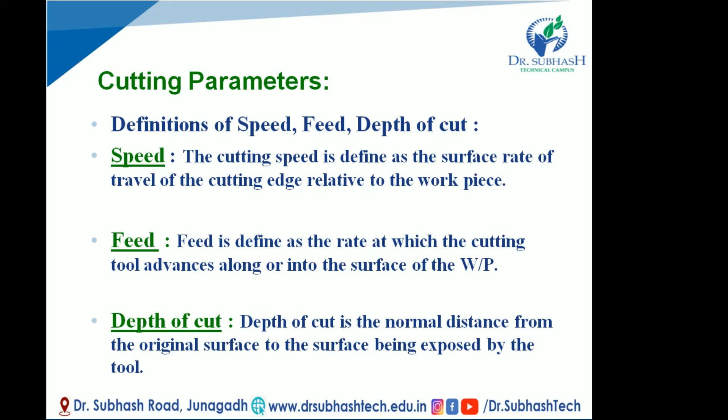We can see that if we are using a single point cutting tool in the lathe machine, then how much diameter we want to decrease on the workpiece is called the normal distance from the original surface, or we can say the surface of the raw material, to the surface being exposed by the cutting tool. It is called depth of cut.

Now, these are the cutting parameters, material removal rate and power required. It may be asked in your examination many times, for example in the GTU final examination also. So how can we find the material removal rate and power required? It can be calculated from the speed, feed and depth of cut that we have already discussed.

So material removal rate is equal to 1000 FDV mm cube per second, where F is the feed, D is the depth of cut and V is the velocity, or cutting velocity. So with the use of this formula, we can easily find the material removal rate. If we can find the cutting velocity, then with this feed and depth of cut, we can easily find the material removal rate.

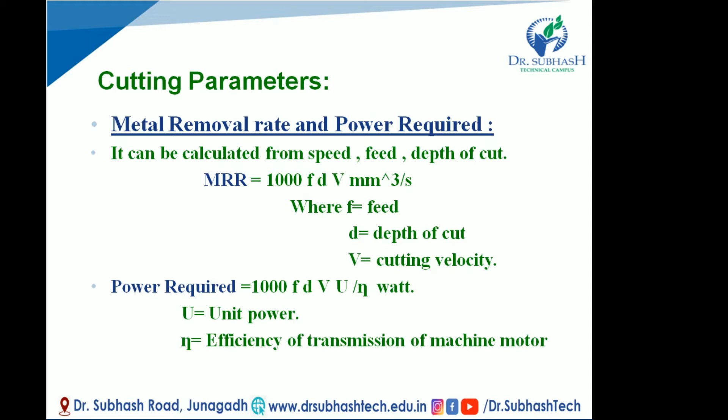Now power required is 1000 FDV U divided by efficiency, in watts. U is the unit power, and efficiency is that of the machine motor transmission. So with the use of this formula, we can easily find the power required, right?

Now an important topic is types of chips, chip formation. So how many types of chips are there if we are removing some metal from the workpiece with different metal cutting? Which type of chip will be produced during different operations with different materials?

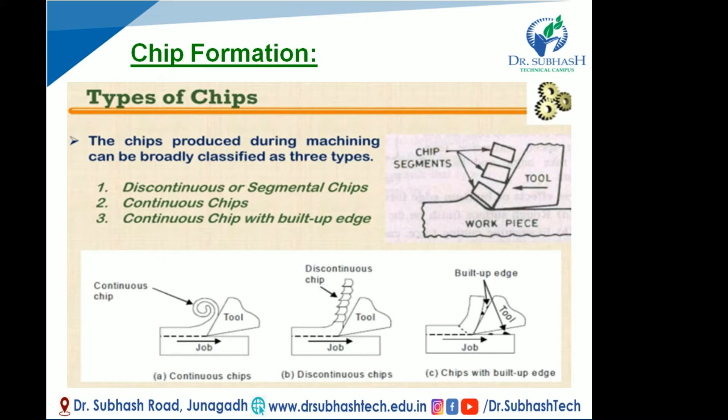This is called continuous chips. The second one is discontinuous chips, which are also called segmental chips. The third figure is continuous chips with built-up edge. Now try to understand the chip formation of these three categories. The first one is discontinuous or segmental chips.

Discontinuous chips are formed by a series of ruptures occurring approximately perpendicular to the tool face, each chip element passing off along the tool face. The chip elements are in the form of small segments, and they may adhere loosely to each other and become slightly longer, right? Since the chips break into small segments, they are also called segmental chips.

Since the chips break up into small segments, the friction between the tool and the chips reduces, resulting in better surface finish. These chips are convenient to collect, handle and dispose of. Discontinuous chips tend to be formed when one or more of the following conditions exist: brittle material such as cast iron, bronze, etc.; large chip thickness; low cutting speed; and small rake angle.

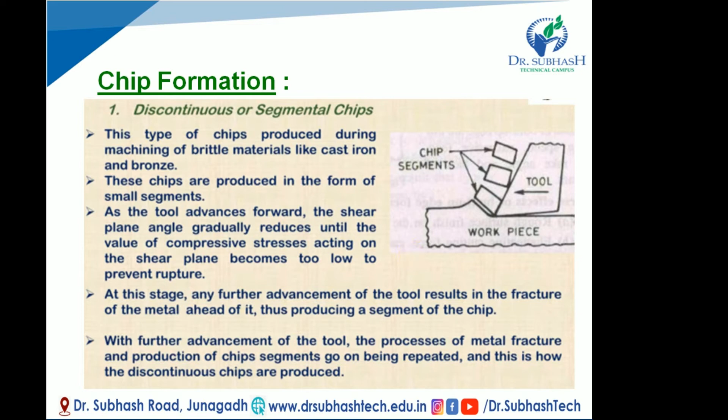Second one, that is continuous chips. Try to understand with the use of the figure how it is produced. Continuous chips are formed by the continuous plastic deformation of the metal without fracture. Continuous chips are produced by the continuous plastic deformation of the metal without fracture in front of the cutting edge of the tool and are formed by the smooth flow of the chip, right?

So mild steel and copper are considered to be the most desirable materials for obtaining continuous chips. Which material? Mild steel and copper. The chips often have the same thickness throughout, and this type of chip is most desirable also since it is a stable cutting, resulting in generally good surface finish compared to the discontinuous chips.

On the other hand, these chips are difficult to handle and dispose of. These are the conditions to produce continuous chips. First, a ductile material. Second, a high cutting speed. Third, a small chip thickness. The rake angle is very large, and minimum friction between the tool and chip. These are the different conditions that can exist to produce continuous chips, right?

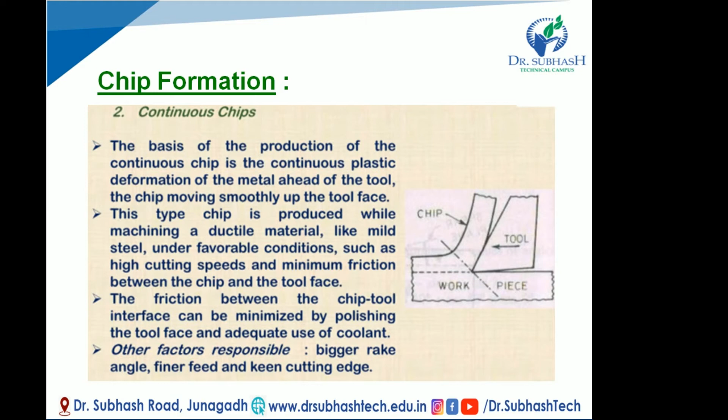Now third one, that is continuous with built up edge. So you can see in the figure the main difference between this figure and the other two that we have already discussed in the previous slides. You can see in the figure, in between the cutting tool and raw material, there is some extra metal. This type of chip is very similar to continuous chips, with the difference that it has a built up edge adjacent to the tool face, and also it is not so smooth.

It is obtained by machining ductile material, the same as continuous chips. In this condition, the high local temperature, extreme pressure in the cutting, and high friction at the tool chip interface may cause the work material to adhere or weld to the cutting edge of the tool. Successive layers of work material are added to the built up edge, and when this edge becomes larger and unstable, it breaks up and part of it is carried up the face of the tool along with the chip, right?

Another thing, this extra material you can see in the figure is like metal welded on the nose of the tool. It is called built up edge. The chip is also sufficiently hot and gets oxidized as it comes off the tool and turns blue in color. Last but not least, it first increases, then decreases, and then again increases. So the built up edge changes its size during the cutting operation, right? So this is the third one, continuous with built up edge.

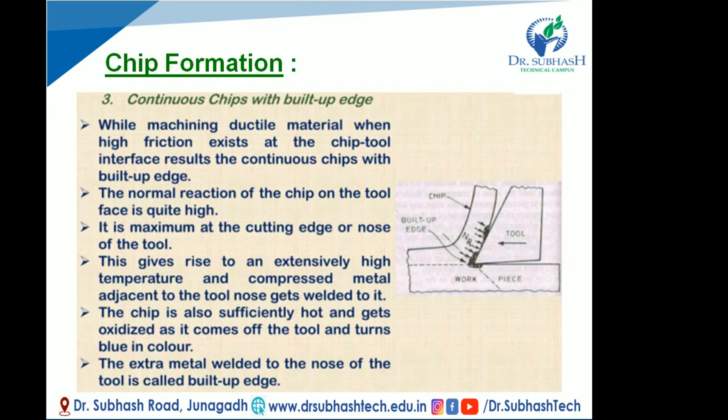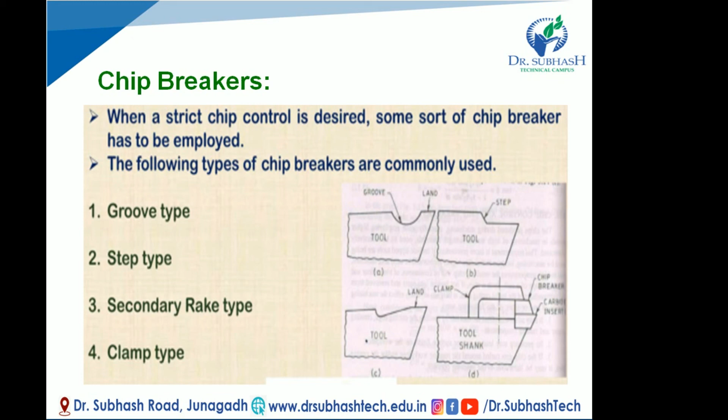Fourth one is the clamp type, over here. With this mechanism we can easily break the chips, which is commonly used in different manufacturing processes, right? These are the mechanisms of formation of chips. The tool will cut or shear the metal provided these different conditions, so we can easily understand the things.

If I want to remove some metal or material from the workpiece, then it is necessary that the tool is harder than the work metal. Understand? Second, the tool is properly shaped so that its edge can be effective in cutting the metal. Third, the tool is strong enough to resist cutting pressure but keen enough to sever the metal, provided there is movement of the tool relative to the material or vice versa, so as to make the cutting action possible, right?